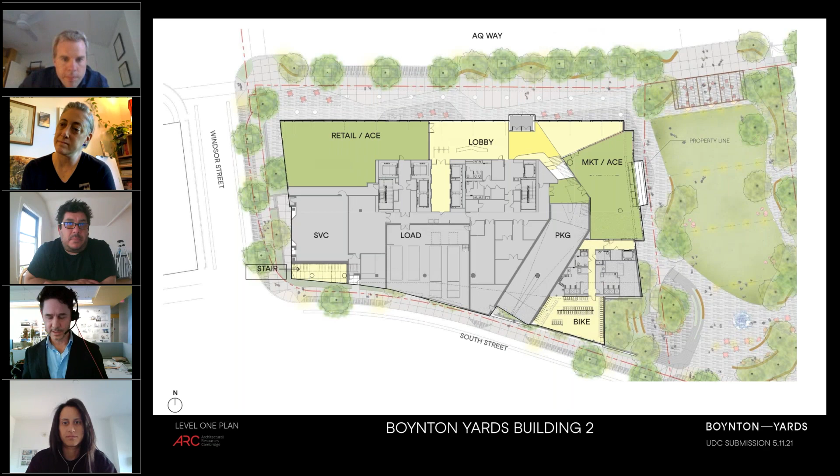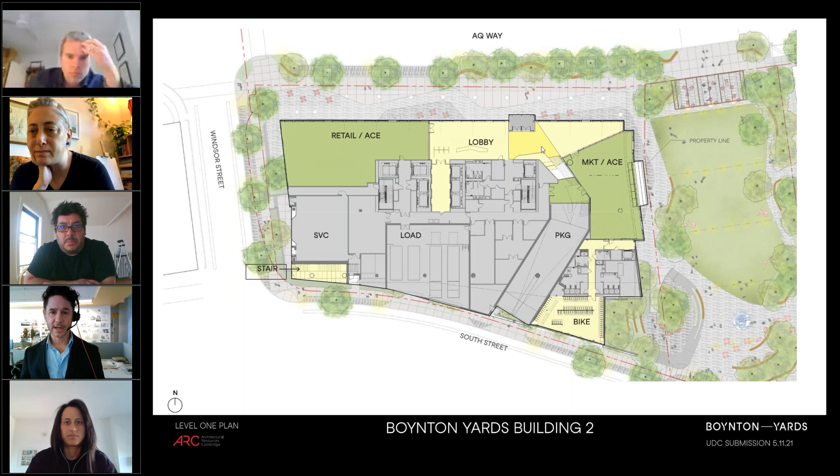And what's labeled lobby—I'll flip back to level 1—you begin to see in brighter yellow here the public lobby connection that then connects to a large public stair that leads up to an arts creative space, a public lobby, and then this exterior public terrace that overlooks the public park. You'll start to see some more images of that as we go forward.

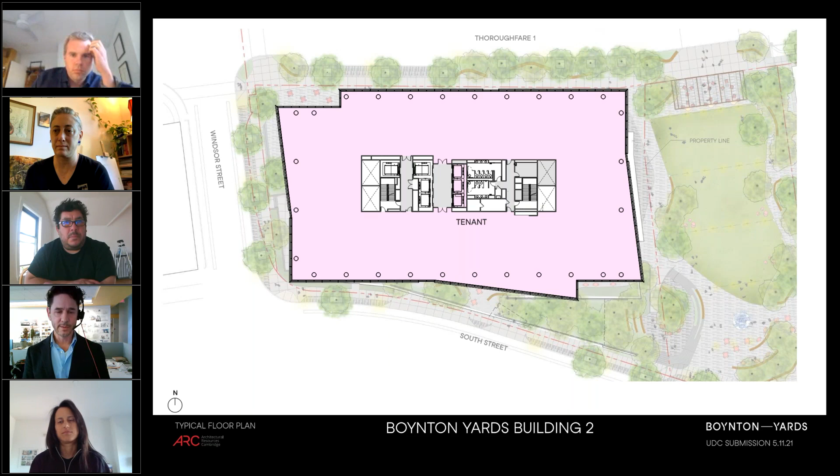The upper floors are lab buildings, so this is the kind of typical floor plate. The insets architecturally are meant to be more transparent moments, and our hope is that we program these lab layouts so these more transparent re-entrant corners could potentially be community or gathering spaces within the lab floors. In terms of the landscape, I'll speak for Ian, and he can jump in if I get anything wrong, but the big change here is the stair on the southwest corner.

One thing we're doing is making this a kind of public access, but also a social stair that allows opportunities for people to hang out. We're putting some planting along the southern edge of the building, which creates a visual connection from west on the left to east on the right, binding the two sides of the building together to the public park on the east side.

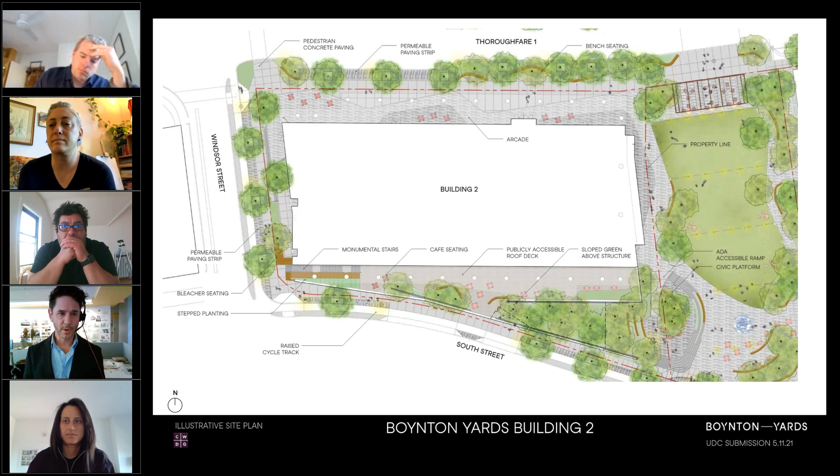The green score is just above the district requirements, and you can see in the left-hand corner how that green space on the public stair starts to contribute to the green score.

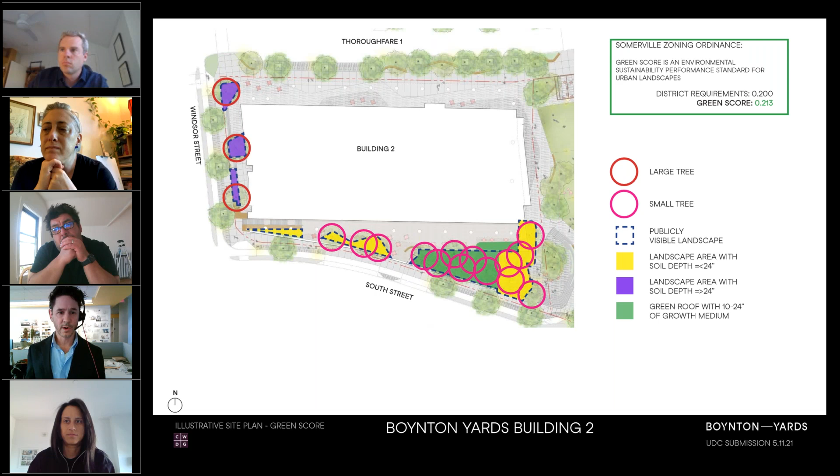As we move around the building, we have a cycle track, so a protected cycleway. This is looking at the Windsor Street side, on South Street.

This is really the section from Copley Wolff that is super productive, that speaks to this green connection from west on Windsor Street to the east side to the public park, and underscores the big idea of the project about the landscape integrating with the architecture, and public and community space integrating with the architecture on more than just the ground plane, thinking about how to get people up to this public space and these potential arts creative spaces on the upper level.

To the right, you can begin to see this raised planting area that connects to the public park, creating more opportunities for people to hang out.

And just parenthetically, last time we met, Ian talked about all the different ways in which the public park could be programmed and people could participate at this level within that kind of public space.

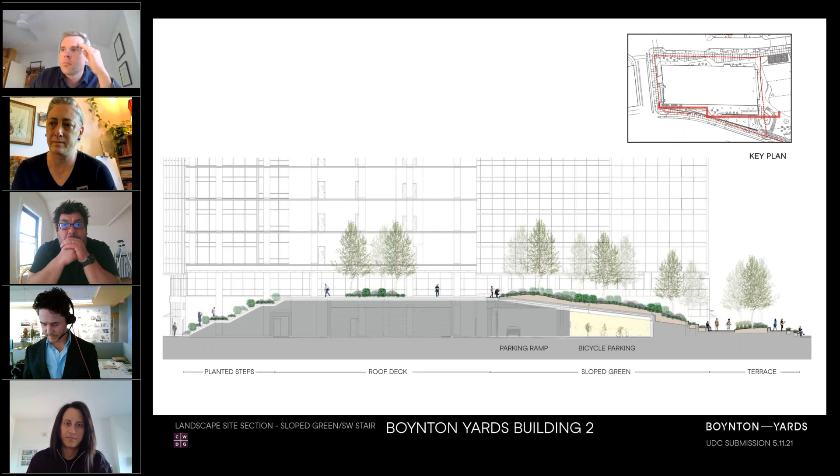There are different levels of public space, so different opportunities for people to hang out. We spoke a little about potentially kids rambling up this sloped green up to the upper level terrace, a different sort of space to engage with than you might normally see.

This is a really helpful diagram to talk about these ideas we're developing. So the civic space to the left and the east, and in between that, adjacent to the bike room, is this double height winter market space, the lobby connection up to the roof terrace, and then to the upper right-hand corner, the public stair. You can begin to see how, in the bright yellow, this public space starts to weave through in and out of the building as a core value for the project.

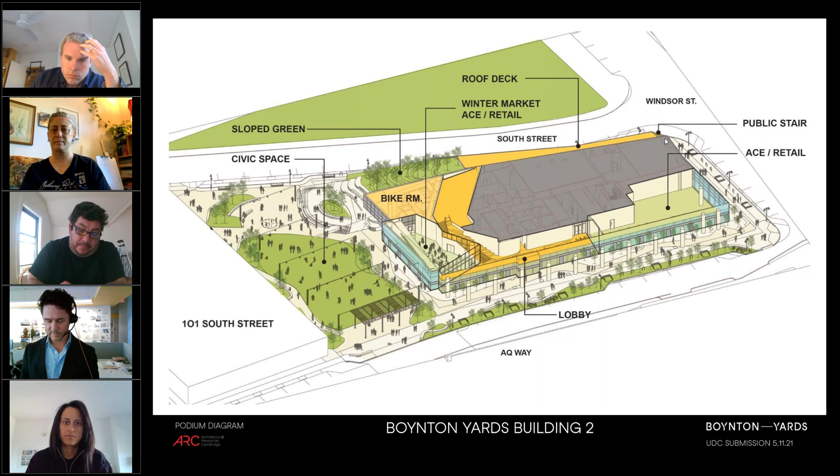So returning to the podium design, just to reiterate the point before, when we met with the UDC last time we had the building largely clad in a kind of charcoal aluminum, and this was true at the base as well. We liked the sort of, Deborah very nicely called it, rigor, the rigorous approach to the materiality and what we felt was a more minimal approach to the cladding system. After that conversation with Tim, Frank, and Deborah, it became apparent to us that that approach was too cold, too sterile, and just not quite right.

So we began to look at other opportunities. As we do, we like to look at things from different perspectives in different ways. We studied working ourselves from gray aluminum to blue aluminum, thinking about aircraft aluminum and that kind of texture, what's called foamed aluminum. Part of that has to do with material studies we were interested in, which then led further, as those elements weren't quite right, to thinking about brick, and then ultimately to thinking about GFRC, Trespa, or a product like Taktl.

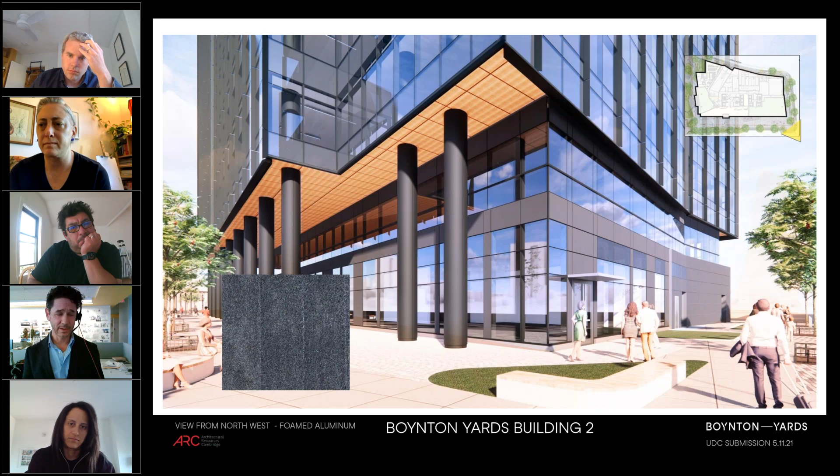So we looked at brick. First, light gray brick, which really seemed out of character with the palette. And then dark gray brick, which is always appealing, particularly in terms of the color.

There's a real nice quality in terms of how it reconciles with the darker aluminum of the larger mass of the building. But as we began to think about it more, it felt right at first, partly because of texture and scale and materiality for people at the base. But it also began to feel a little too residential and disconnected with the larger program of the building, not right for a lab building, and also maybe not quite right for the overall scale of the building.

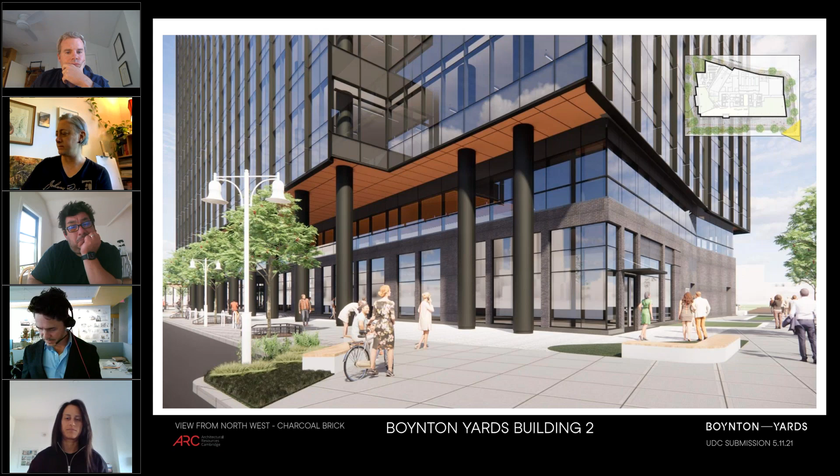So we began to think about something that really began to mediate between the larger scale of the building and the scale of the podium base. To that end, we began to think about GFRC and the opportunities that GFRC provides for us.

So here you're looking at an articulation of something like Okoskin, where we have hidden clad GFRC panels with perhaps a kind of vertical texture, change in color. So what's great about this is that we can kind of articulate

materially something that is a little bit more haptic, more natural to the touch. It mediates between the scale of the building, but also provides a range, scale, and warmth at the base that starts to feel really appropriate. And so this is definitely our choice at the current moment.

Whether that's something like Okoskin or Tactile or some other GFRC material, we're not sure yet, and we'll really dig into that as we go into DDs. But right now, this direction really feels right to us as we worked through those previous studies. This is starting to work.

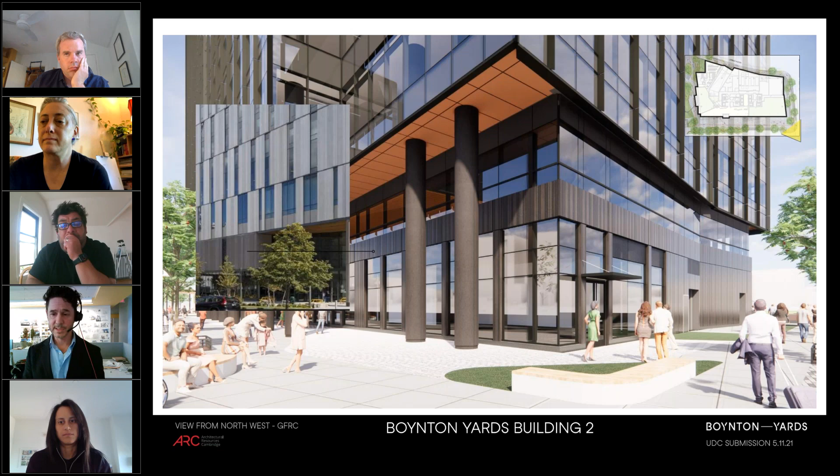So what you're looking at here is the view from the northwest, AQ Way and the corner of Windsor Street, as you're approaching the public face of the building from Union Square. To the left and beyond is towards the civic space and the landscaped park to the east, and to the right and beyond is South Street and that public stair that we were talking about before.

As we move around the building to the northeast corner, here you're looking at how the building podium base begins to engage with the winter market. One thing that came up last time was that the volume of the winter market, which is a double height space, had previously only been expressed as a single height space.

And Deborah very rightly pointed out, and the rest of the committee, that that was incongruous with what we're trying to do with this interior double height space. So we made this change, and it's been very productive we think for the design.

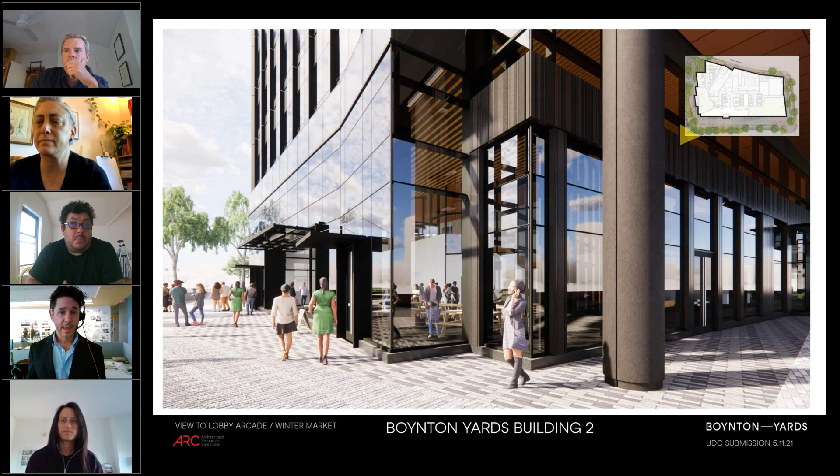As we move around the building, pulling back into the civic space, you're looking towards the north, the lobby entry, the articulation of the Winter Market facade, and to the left you can begin to see the raised podium and connection to the sloped green on the southeast corner of the building.

And here, as we're moving through the lawn of the civic space, looking towards the Winter Market and the big door that opens up, so you can create this strong inside-outside connection.

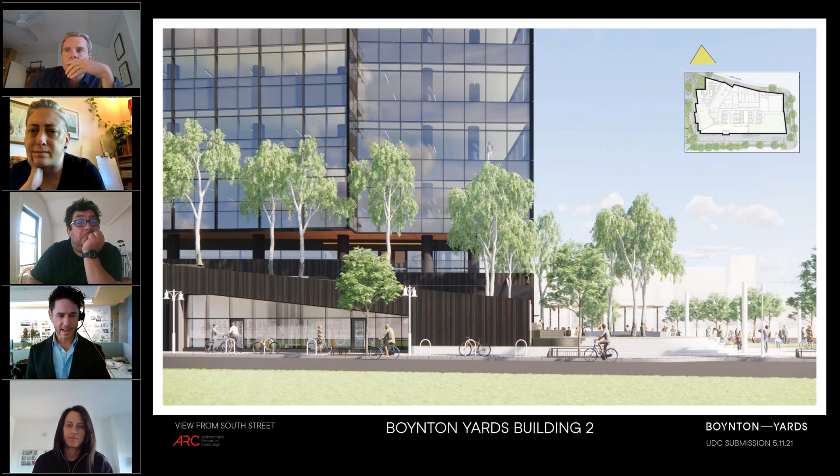Moving around to just beyond South Street, you're seeing the edge of the sloped green, the raised landscape podium to the right, and to the left here with the glass is the public bike room of the building. And you can see the public terrace beyond that.

Preferred facade concept. Last time we met, we looked at three different ideas for articulating the massing of the building. On the left, facade concept A, which I'll go into in more detail. To the right, facade concept B, more of an A-to-B idea where one half of the building would be heavily textured with sunshades and mullions, and the other half much more glassy. Upon further reflection, this doesn't afford the approach that works best from a sustainability and solar perspective, since it creates on the east facade an unvaried glass facade with no opportunity for sunshades. So that started to seem like it wasn't quite working.

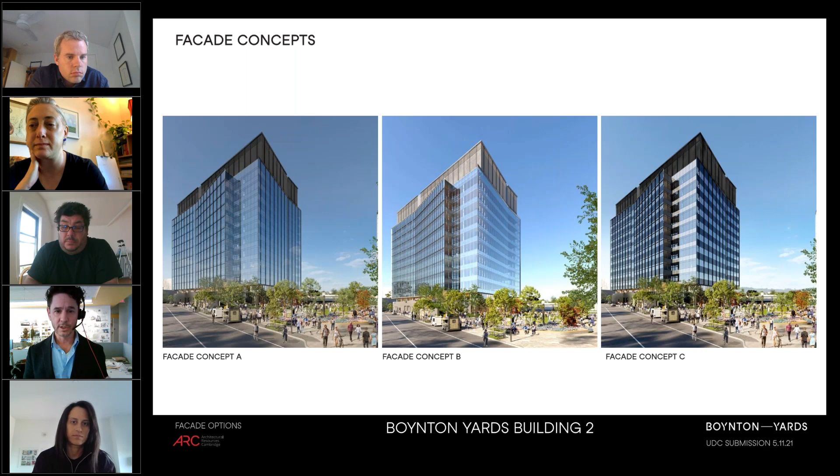We also explored an idea of a building that was a lot more metally, with metal articulated spandrels, and that building began to feel too heavy to us. So our preferred concept is definitely A, where there's a good balance between the articulation of exterior sunshades — vertical sunshades on the east side and south facade, both vertical expression and some horizontal sunshades — to control daylight infiltration in the building.

As we move around the building conceptually, which we discussed last time, we call this concept for the building an open book. It was one of the three building concepts we studied. We have this idea of spines in the center of these facades, and those spines are a bit more glassy moments that you can see articulated in blue.

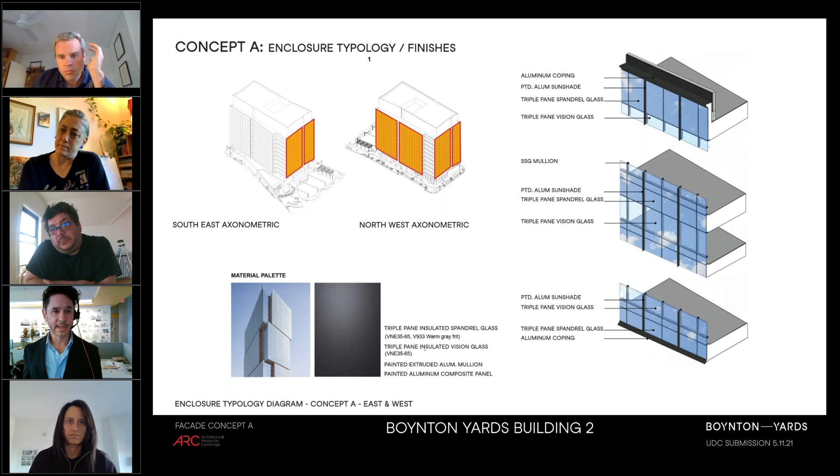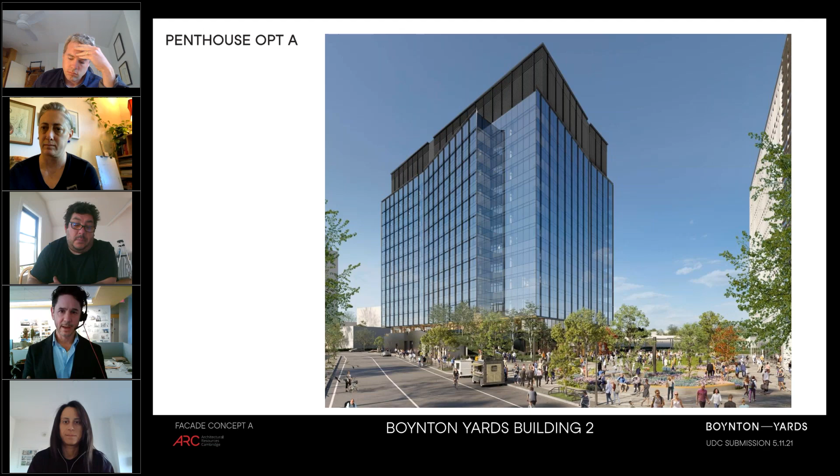Working with BR+A over the last couple of weeks, we've been able to push and pull, squeezing the penthouse much more in from the west and east sides to reduce the overall apparent scale of the building. We've also added different levels of horizontal and vertical articulation. Previously we had a cornice at the very top of the penthouse, and we began to see that cornice made the facade very heavy. So we began to think about weaving a bit more in terms of how we articulated the penthouse.

So taking some of these verticals and stopping them short, having a more prominent horizontal at the top rather than a very heavy cornice, and then lightening up the material overall. As a first step, this began to feel like it was really reducing the overall scale of the penthouse.

And lightening it up a lot. As we move forward, started to think about differentiating the top band as even lighter, perhaps a more silver metallic metal to play with scale. I think this even starts to help more in terms of reducing the apparent scale of the penthouse.

Taking that a little further, creating a kind of gradient in the articulation of the penthouse, which I think is another step further in reducing the overall scale. And then option D, starting to weave in some more silver verticals to create a little more activity and texture on the penthouse structure. So that's sort of where we landed.

And then the last is a look from the Prospect Hill skyline. So as you're on the upper terrace overlooking the road that goes up to Prospect Hill and the monument, there's a bank of trees, and you can see the US 2 development to the right and building 2 in the scale of the city's skyline right there in the middle of the screen.

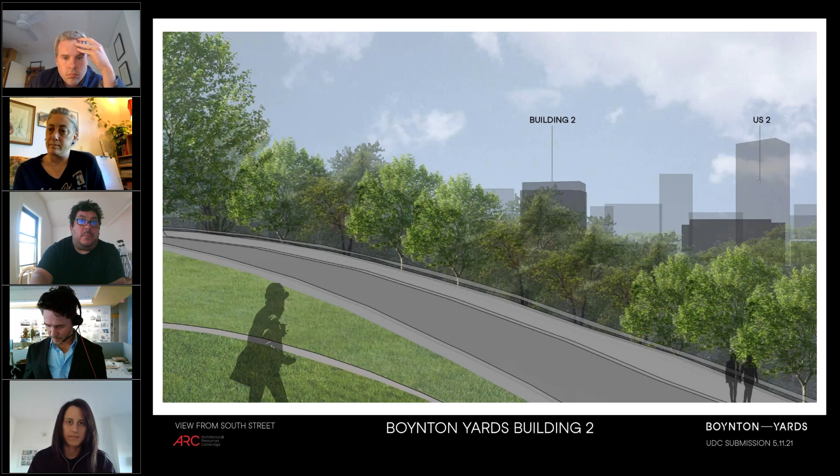So that was, I hope, not too brisk and helpful. Heidi, I hope I gave you enough background information about the prior conversation to give you a sense of the overall building. Questions, comments? Do you want me to go back through the slides again?

Thank you, Victor. We'll definitely take votes on all of the options of things that you showed, so that you have at least direction on each one of those. But I'll open it up to the voting commissioners to start.

I want to say that the way that you responded, I think it's great. Frank, it's really, really hard to hear you. Because we were so far away, can we get it any better now? You're still very echoey and crunchy sounding. You will? I'm going to mute myself and try to do the headphone. Okay, okay... somebody else.

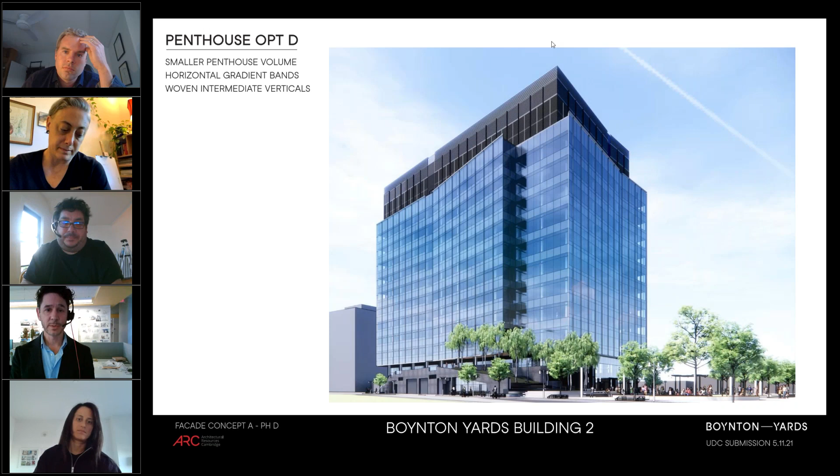Correct. And I appreciate the challenges of working out the penthouse - solving the functional issues of actually fitting the equipment that's necessary, the air handlers, the exhaust air handlers, and getting them to work.

But I still think there's an opportunity not just to solve the functional issues, but to reinforce what I think is a really elegant architectural idea - this idea of the unfolding book. You have two facade types now, and we had a diagram showing that earlier, that end in the same horizontal plane at the top.

I'm wondering if there's the possibility of extending one of those up to cover part of the penthouse. So it isn't just the same horizontal datum across the top of both facade types, but one is extending above the other.

Yeah, I think that's a great idea, actually. And it doesn't have to be the full 35 feet or whatever it is - it could be one story.

Also looking at the Novartis buildings in Cambridge - they take the whole top story of the building as their first mechanical level, so it's the exact same architectural skin as what's below, but they just bring it up a story and use that to reduce the apparent height of the penthouse. So maybe that's a way to go. Okay, we can look at that again.

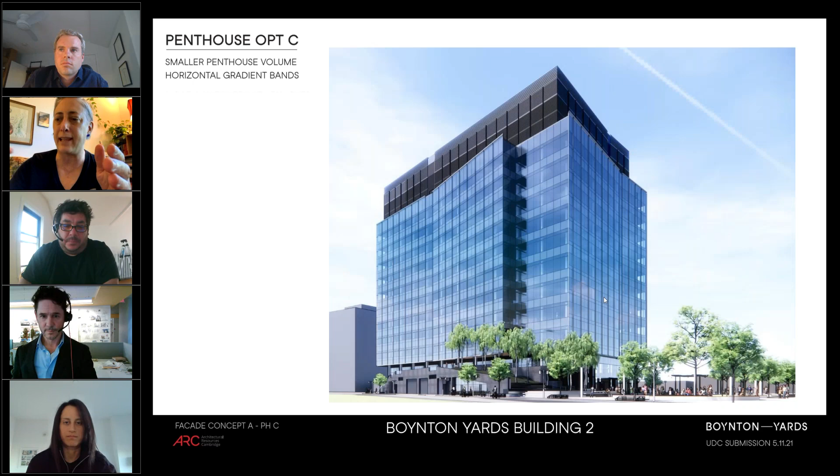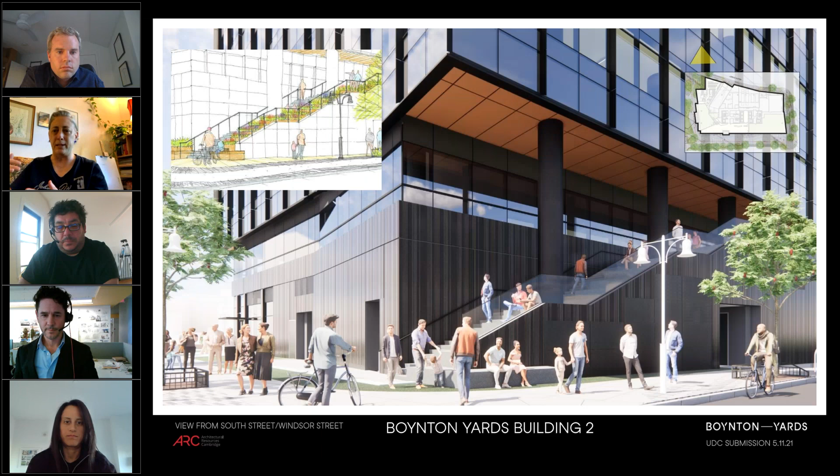That felt a little, again, like as you guys get through DD, just start to articulate what that experience is of people actually at the ground level, whether you want the building to feel like a lab building, or a little bit more human scale.

I also very much appreciate those big open doors. This facade feels a little building scale rather than human scale, and maybe there's just a way that bottom band gets articulated slightly differently, or maybe those awnings get a little more expressed. Just something that feels a little less like you've got a lab building right next to a park.

Got it. I think that's not really what the programming intent is for that ground level. There's a project I'm working on right now where we have one of these big garage doors, and we did have some struggles with programming the interior space because there are certain code requirements about how far you're allowed to program up to a garage door, a big open door. So that's something I'd ask you guys to look at.

Yeah, it was for a restaurant I'm working on, and we ended up having to do something different because you're not allowed to program with it. We weren't allowed to program within about 10 feet of the opening if it was a food space.

Oh, that's very interesting. Okay, unfortunate. Yeah, okay, it's just something to keep in mind. We'll dig into that. Thank you.

Maybe this is just a taste thing, but I find the bike room entrance to be the most interesting in this facade as it moves around the building, how you're starting to have that materiality, and it feels very human scale. I'm not suggesting you do that exact same thing here, but there's a human scale for me that's a little bit missing from the skin that separates the public realm from the exterior and the interior.

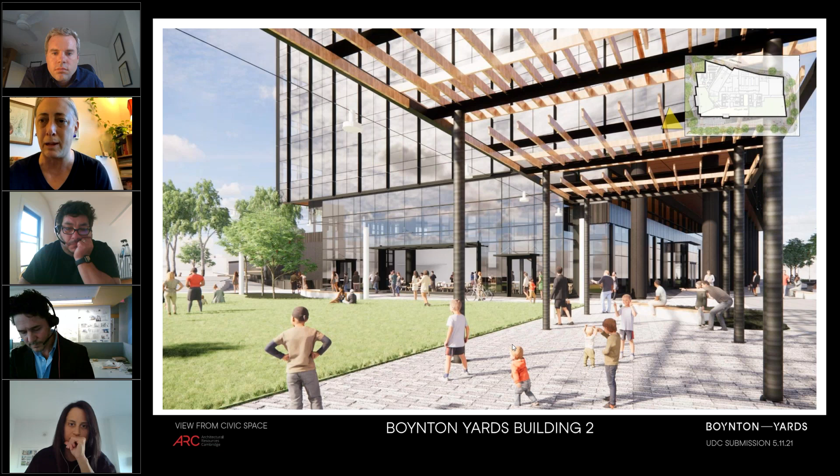Great. Maybe what might help here is to bring that band all the way around, even though it's double height. Perhaps bringing in the band of GFRC to this space above those doors may help reduce the scale of that space. It's just one option.

Yeah, if it makes sense, that could be an option for sure. We looked at that prior to developing this view, and the problem was it was creating kind of indeterminacy, but I think we're not quite there yet, honestly. Again, this is another thing to really work on through DD as we dig into the details.

Yeah, definitely. And maybe it's just the curtain wall. Maybe the curtain wall is just a different, smaller scale, or more horizontal, or there's more mullions, or just a way of creating more separation from the rest of the building.

Yeah, and as we're talking this through... No, I agree, Heidi. I think it's a good comment, I'm glad you talked about it. I think the scale of the volume feels good, right? But maybe it really is just a materiality thing.

Yeah, I mean, this view feels kind of coplanar with what's above, even though I know it's not. Yeah, just too similar with the floor above.

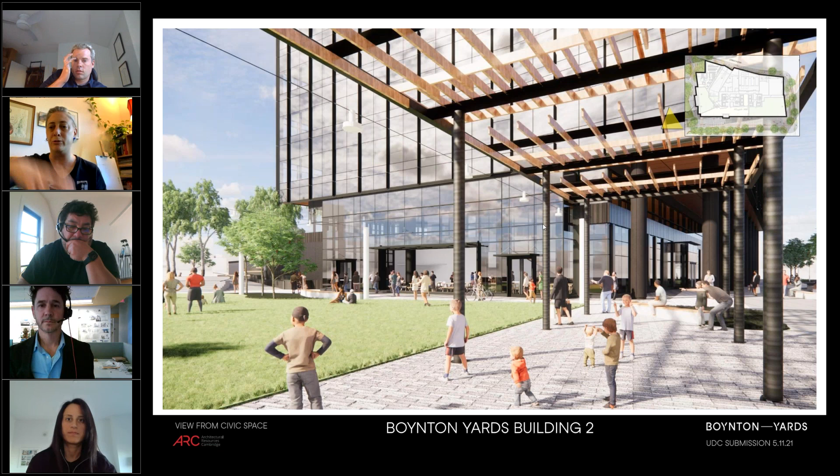And maybe, again thinking about the penthouse, there is some kind of greater alignment with the building, the bottom and the top of the building, that hasn't quite been discovered yet. As an overall move through the building, that could be really powerful.

Yeah, I like the way you talked about it, this balance between the ground and the sky, and how it moves through the clear skin. It's a very poetic way of putting it. Oh, thanks.

But yeah, otherwise, I don't really have any further comments.

Could we take a look at the north side elevation again?

So the north side is planar, has no horizontal sunshades, and has finely articulated verticals every other curtain wall module. Our overall structural module is on a 22-foot grid, and our curtain wall module is on both an 11-foot and a 5'6" bay. So you're seeing the articulation of the verticals straddling the primary structural grid, creating an AB rhythm between the primary structural axis on the facade and the articulation of the curtain wall.

Okay, no, thank you. When you paged through them earlier, I had thought perhaps they were the same on the south and the north, and I thought that would be... Yeah, the south has a lot more texture to it.

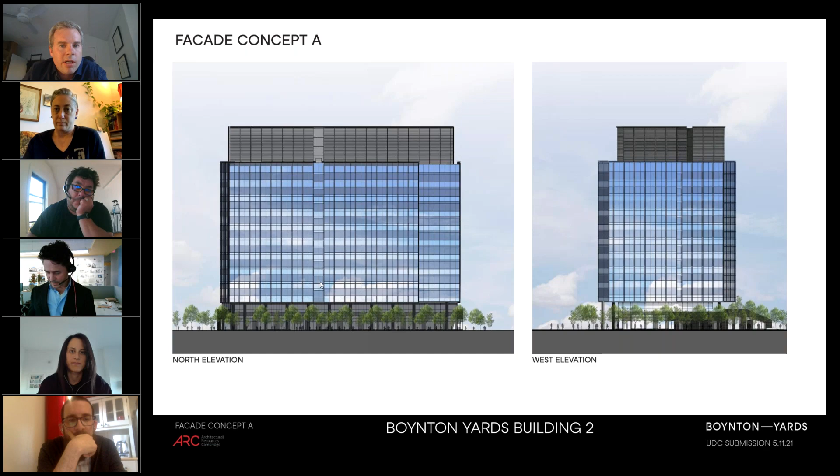That makes sense. The spine of the two leaves, is that coplanar with those two glazing modules? No, it's actually inset slightly. I'll go to the plan. Or Victor, the axon shows it best, I think. Oh yeah, thank you.

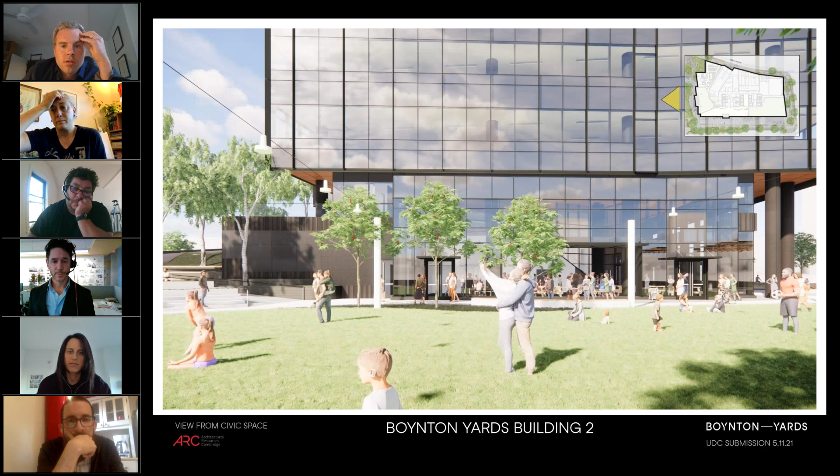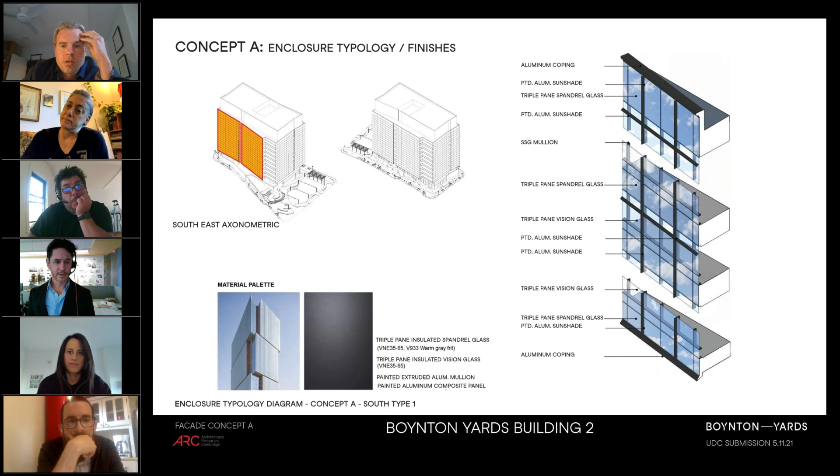So the detail of it, you can see here where we look at the spines, there's a bit of an inset and a change in plane to the more glassy vertical that you see here. And that change of plane is then accentuated with the vertical articulation you see left and right of the center spine of the open book concept.

And then just as a parenthetical note, if the building middle is the glass curtain wall, there's the articulation of a lower cornice, which we're calling aluminum coping, and a top cornice of the building, to clearly define the podium base and the middle top that leads to the penthouse.

Okay. No, thank you, I think conceptually that sounds great. I just, and this is really a DD level comment too, but as you refine that detail at the intersection between the spine and the leaves next to it, and look at how far that's set back, I'd encourage you to think about how legible it is from a distance. Yeah, that's a great point. Appreciate that.

Any other feedback from the other commissioners?